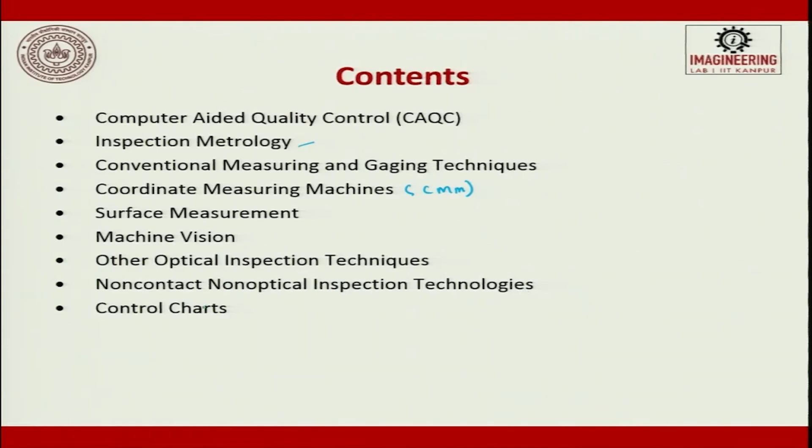So, in this lecture, we will see the following content. The first one is computer aided quality control; we will see the definition. Then we will see inspection metrology, then conventional measurement and gauge techniques. Then we will discuss the coordinate measuring machine, which is exhaustively used. Then we will look into surface measurements, machine vision, optical inspection techniques, non-contact non-optical inspection techniques, and finally, we will see some control charts in this lecture.

So, computer aided quality control is the engineering application of computers and computer controlled machines for the definition and inspection of the quality of the product, which includes measuring equipment management, goods inward inspection, what came inside as input.

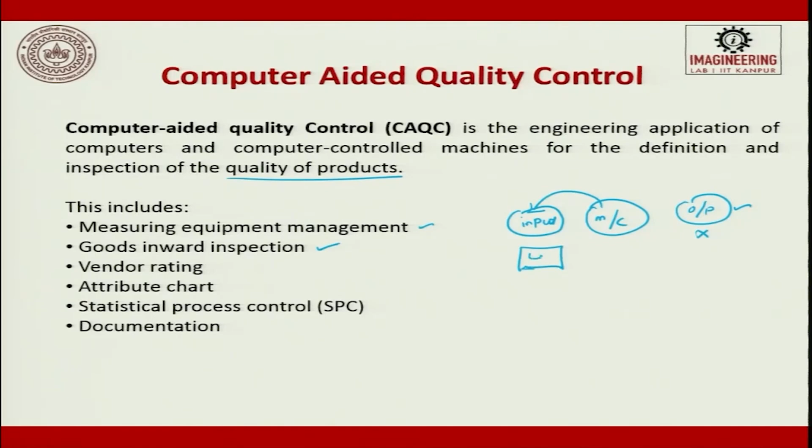See, currently it is pretty interesting. You have a machine, you have an input, you have an output. When the output is good, everything is good. When the output is bad, we just go back and look into the machine. If the machine is all right, many times we say okay, there is nothing wrong, it happened by chance, and we go. But it is also worthwhile to check the input raw material which comes inside, its consistency when it is given to the machine, and then the output. So, goods inward inspection is also very important: what batch size inspection you did and what is their outcome. So, this is also measured in goods inward inspection.

Next is vendor rating, which is very important. I have supplied 10 same items to you over the last 1 year. What is the performance of those parts which I have given to you for machining? So, that is called vendor rating. How perfect I am, what is the scrap which I produce, and how many are marginal, good and bad. So, with that we give a vendor rating.

Then attribute charts, then SPC, statistical process control charts, and finally documentation. All these things are getting into the information of computer aided quality control. Because of computers, all this data can be fitted inside, and it can move along with the parts when they move from factory to factory, from assembly station to the final station, everywhere. So, this is a very important advancement, and it makes the CIMS environment more successful.

Earlier, quality was thought of after making a part, checking for quality. Now it is thought of while making a part. So, not even the first part will be scrapped today.

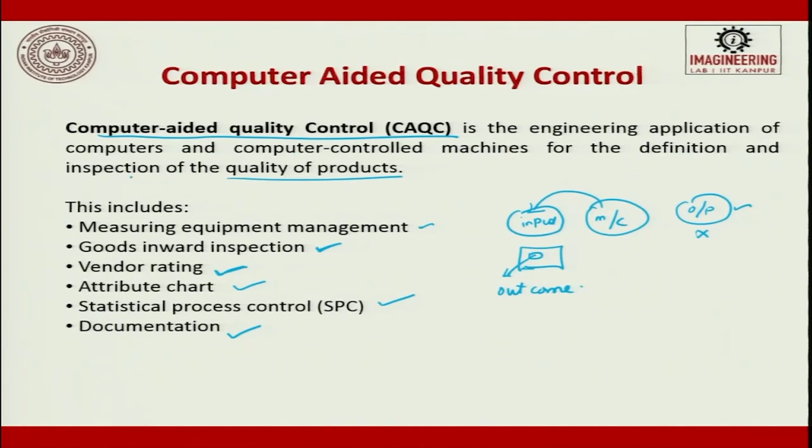So, this is the definition for quality, computer aided quality control. Computer aided quality control is the engineering application of computers and computer controlled machines for the definition and inspection of the quality of the product.

If you put it in a schematic or block diagram, computer aided quality control gets the following information: product identification, process identification, parameters to be tested, upper and lower specification for a part's attribute, and what the quality standards are.

For example, ISO, QS, BIS - these are some of the standards. Then government standards, test programs, test procedure - how to do it. For example, when you have to measure the thermal conductivity of a material, we should follow a certain procedure, establish it at normal temperature and then measure it. So test procedure is very important.

When we are trying to measure the temperature induced phenomena on linear expansion, the test condition has to be at room atmosphere, with certain parameters set. That is called a test procedure. How it has to be done while using a measuring device, Abbe's principle has to be followed. All these things are put in the test procedure.

Then algorithms to evaluate the test data. For example, I have a flat plate. If I want to measure the flatness of this plate, I have to take all the discrete data points across the flat surface. Then I get the data.

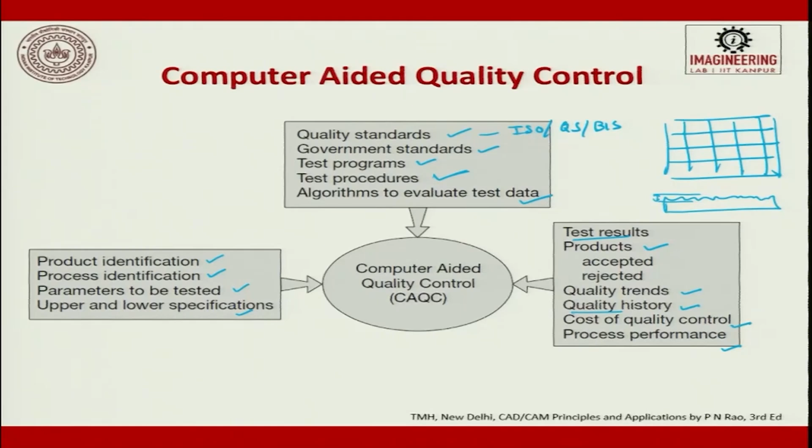So how does this happen - first we will have a CAD. From a CAD it is attached to computer aided drafting and documentation.

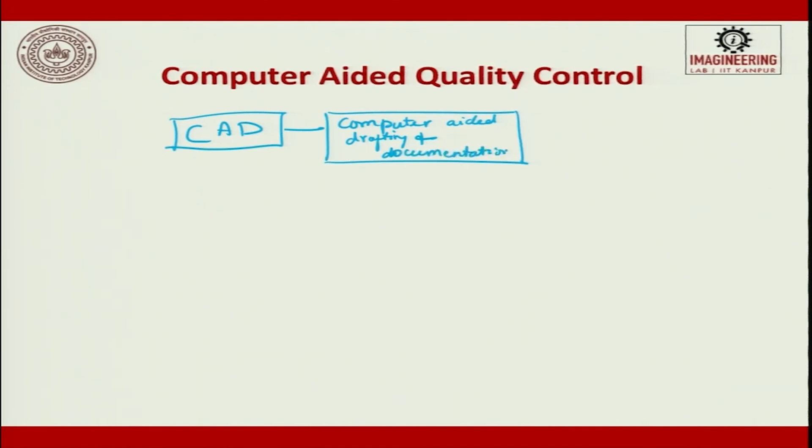From there the data goes to computer aided process planning. From the computer aided process planning it goes to a process planning. Then from there, here you have a drafting, this goes to process planning.

So when I talk about CAD, we talk about product concept and then design engineering. And from design engineering it goes to drafting. So this product concept comes from customers and market.

Here we talk about the QC, quality control, and here comes computer aided quality control. Look at it, how holistically it is all getting built.

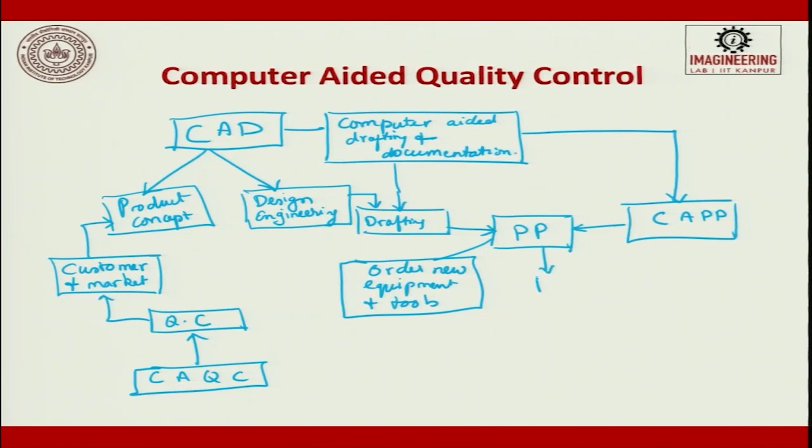From the process plan, what you get is order, new equipment and tools. Then from it goes to a production schedule. And from production schedule it gets to production.

From the quality control, for production we try to have a computer control. So we will have material handling, machines and material handling. So this goes here: the quality control from here to production, and it also gets the information back and forth between these two, and this is the data which flows from here to here.

This is an overall holistic view of the complete industry, and you can see where CAQC comes into action. CAD can be split into product concept and design engineering. Design engineering leads to drafting, and drafting information goes to PP, which is process planning, and computer aided process planning comes here and helps it.

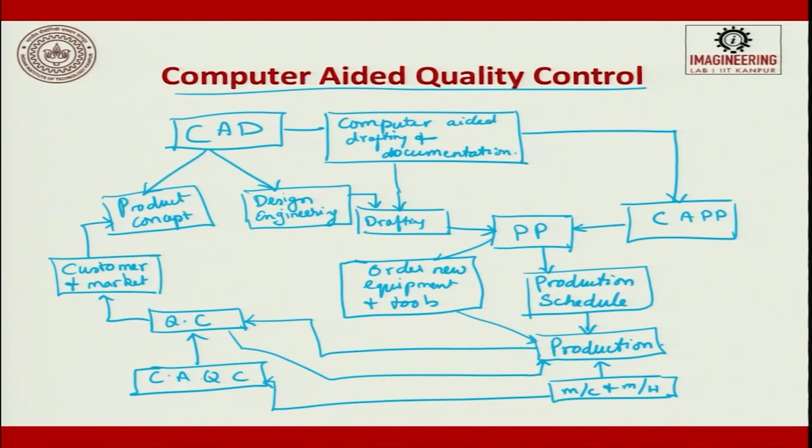From here we try to see whether there is a need for ordering new or old machines, then a production schedule is done and production happens. In production we will have machines and material handling. All these things give an input to computer aided quality control, which in turn gives to quality control. Quality control in turn gives the opinion to the customer, and the cycle gets completed. This is a very important block diagram which talks in totality about everything that happens inside a CIMS environment.

Now let us see what is inspection metrology, which is very much talked about. First we will try to understand what is measurement. Measurement is a procedure in which an unknown quantity is compared to a known standard using an accepted and consistent system of units. You compare against a standard using an accepted and consistent system.

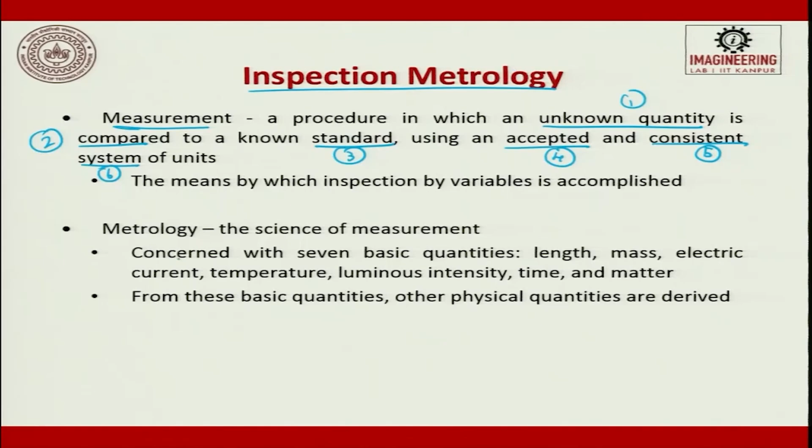So the keywords are: unknown quantity compared with a standard, accepted consistent system of units, the means by which inspection by variables is accomplished. Metrology is nothing but a science of measurement.

Metrology is concerned with 7 basic quantities: we measure length, mass, electric current, temperature, luminous intensity, time and matter. These are the 7 basic quantities which are measured. The science of measurement is nothing but metrology.

So this metrology goes here, that is inspection metrology. From these basic quantities, other physical quantities can be derived. These are the 7, but many things can be derived from them. The most interesting is length measurement, mass measurement, and today exhaustively electric current, temperature, time and matter are measured.

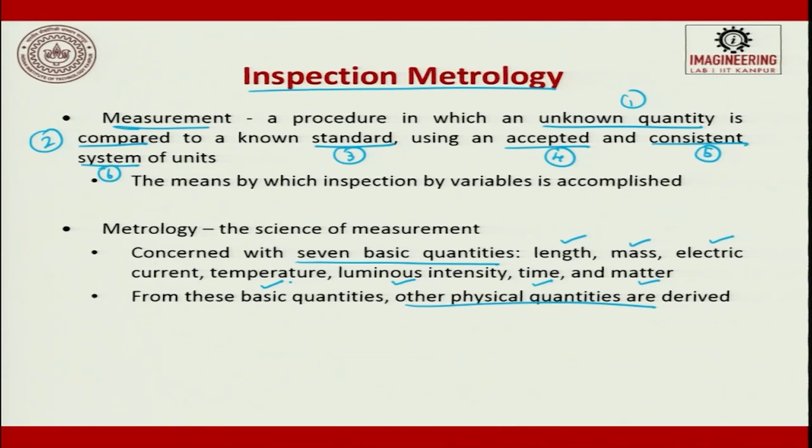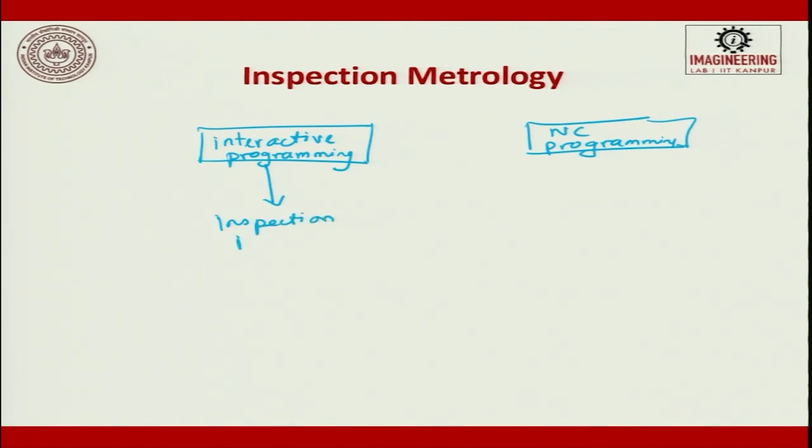When we talk about inspection metrology, we have an interactive program and we have NC programming. So here an inspection program is given, and there is an inspection which is done by a robot or by a machine.

So we will have a machined part. From the NC program what you get is G codes, and this goes to a milling machine, and this leads to the part. So this is the thing.

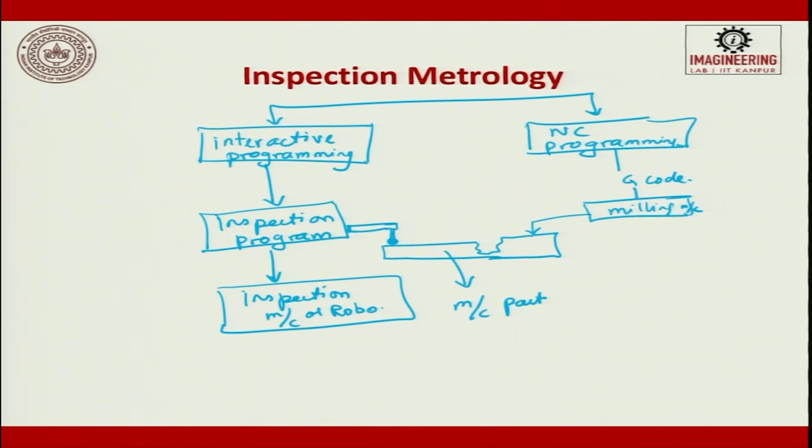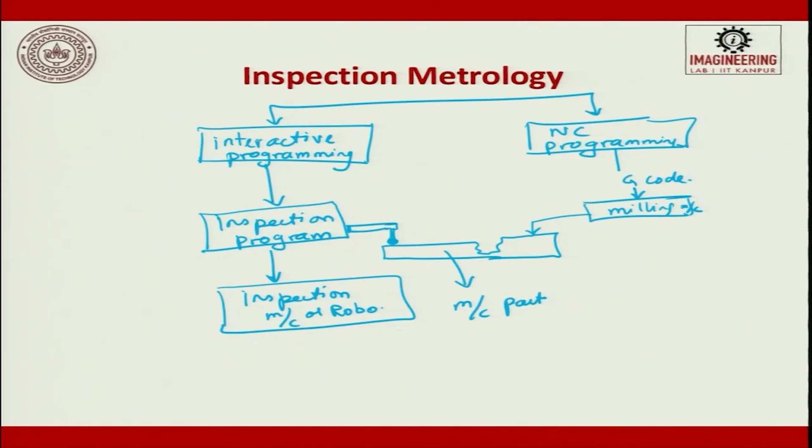You will have an interactive programming, and from the interactive programming you get an NC program. From the same you also try to get an NC program as well as an inspection program. The NC program is given to a milling machine to produce a part. Then the program tells you what this machine has machined, those critical points to be measured, and the measurement will be done by a robot. So this is a separate vertical, and this is a separate vertical. This clearly shows how the interaction happens between the inspection program and the NC program you generate.

The characteristics of measuring instruments: first is accuracy. We have seen accuracy and resolution in robotics and in CNC, so a quick recap. Accuracy is how closely the measured value agrees with the true value. Resolution is the smallest variation of the variable that can be detected.

Between these two you have one more terminology called precision, a measure of the repeatability of the measurement process. Generally a rule of 10 is used: the measuring instrument must be 10 times more precise than the specified tolerance. For example, if 6 plus or minus 1 millimeter is the tolerance given, the measuring device must have 0.1 millimeter as the precision.

The speed of response is how long the instrument takes to measure the variable. You might have data measured, at what time it comes to a computer and how the data gets transferred, the time involved.

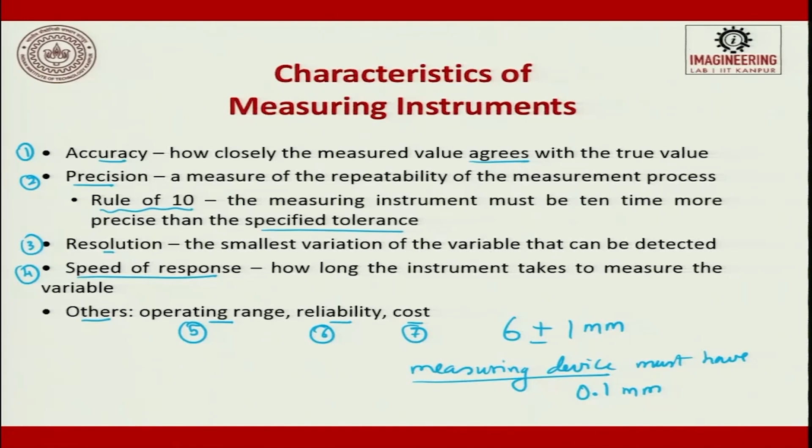The other important characteristics for a measuring equipment are operating range, reliability and cost. So accuracy, precision, resolution, speed, operating range, reliability and cost - these are the 7 most important characteristics of a measuring instrument.

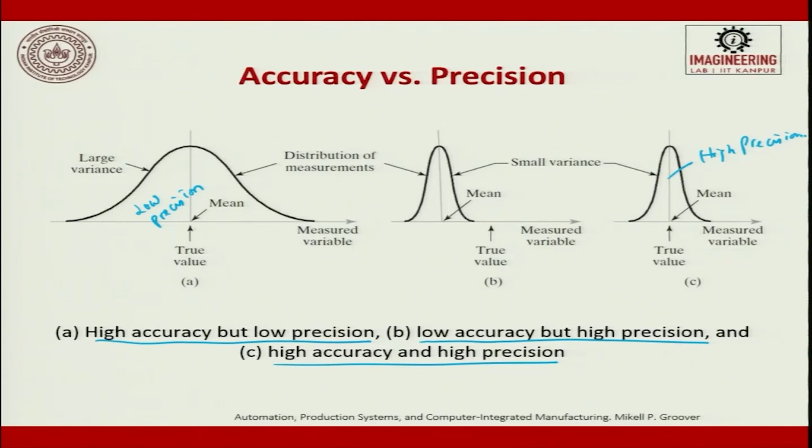There are two types of instruments generally used for measurement: one is analogous, the other is digital. There is a mixed opinion - people say all analogous instruments should be converted into digital and we should use digital data, but now people say that digital puts a restriction on increasing the resolution further. So now it is considered better to have analogous data rather than digital instruments. So there is a mixed opinion, and we can choose either an analogous or a digital instrument depending upon the requirements.

The advantage of analogous is the output signal can take on any of an infinite number of possible values over its operating range. If you want to split it to the smallest level, you can keep splitting if you have analogous data. Reconstructing from digital data to analogous data will always have some error, that is why people say digital has a restriction. Earlier people used to convert from analogous to digital, now people are going from digital to analogous.

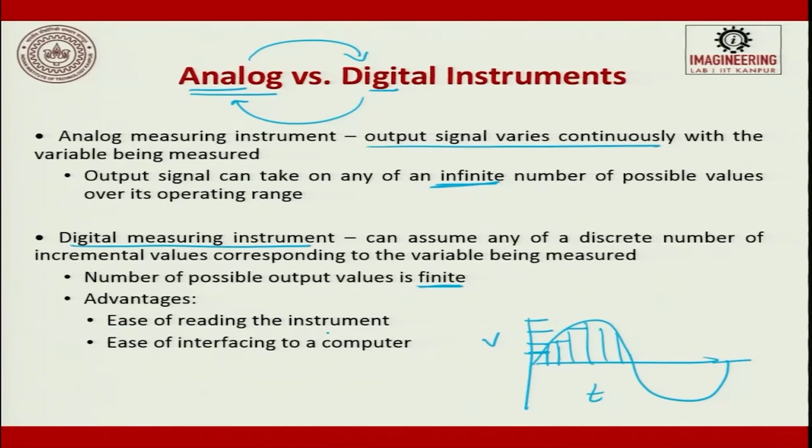So here the number of possible outputs is finite, here it is infinite. The advantage of digital is it is easy to read the equipment and easy to interface to a computer because it is a digital value.

There are two basic types of inspection techniques: one is contact, the other is non-contact. Wherever there is a soft material and wherever there is a complex geometry, we try to go for non-contact inspection.

Contact inspection makes contact between the measuring device and the object being inspected - the instrument and object touch. Here, in non-contact inspection, the instrument and object do not touch.

So what can we use? We can use light, electromagnetic field, proximity sensors can be used, light can be used, we can use pressure and so on. So in non-contact type, it does not make contact with the object being inspected. This is generally preferred for soft and complex geometries.

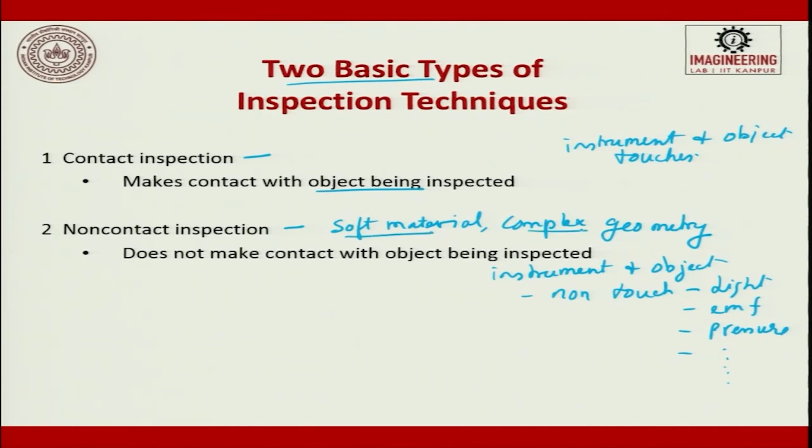Contact inspection techniques use a mechanical probe that makes contact with the object being measured or gauged. The principal techniques are conventional measuring and gauging instruments. Gauges are only used for mass production and are generally used to have a relative comparison - they will not give you the absolute value.

Absolute value cannot be there. It will just measure and say okay, it falls within the deviation, you are getting it. So, conventional measuring and gauging instruments, manual and automatic, all these things fall in this technique.

The coordinate measuring machine is a part of a contact measuring machine. Today you also have non-contact type coordinate measuring machines, in which we use optical exhaustively. Then stylus type surface texture measuring machines are the other thing. So, the three principal techniques are conventional measurements, coordinate measuring machine and stylus measurement.

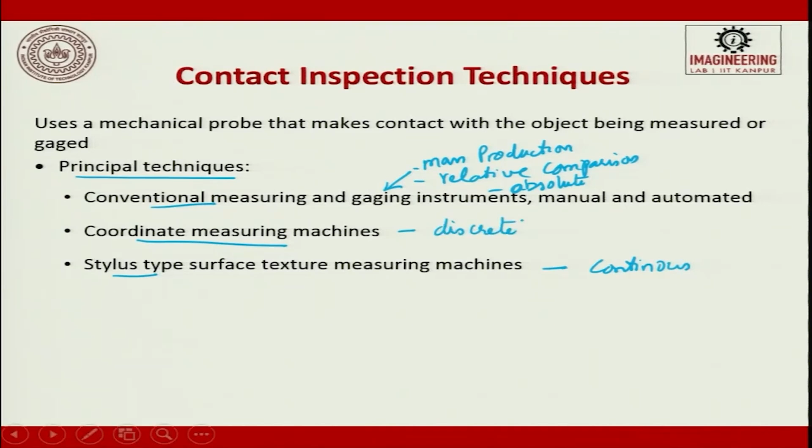So, the difference between coordinate measuring machine and stylus is, here it is continuous data we get, here it is discrete data we get by using the same contact probe, we touch and then get it. So, when we talk about non-contact inspection techniques, they use a sensor or a probe located a certain distance away from the object being measured or gauged.

So, two categories: one is optical, which uses light to accomplish the inspection; the other non-contact uses an energy form other than light. So, the advantages of non-contact inspection: avoid possible damage of surface objects, that is what I said, soft materials, it can be skin, it can be rubber, it can be PDMS, whatever it is. Inherently faster than contact, of course, yes, it is fast because it is going to scribe over and then go, it is not going to touch.

So, it will just move across it, can often be accomplished in production without additional part handling, and then increase opportunity of 100% inspection. So, all these things are possible in non-contact. Today, because of this advantage, non-contact inspection is gaining more importance in a factory environment.

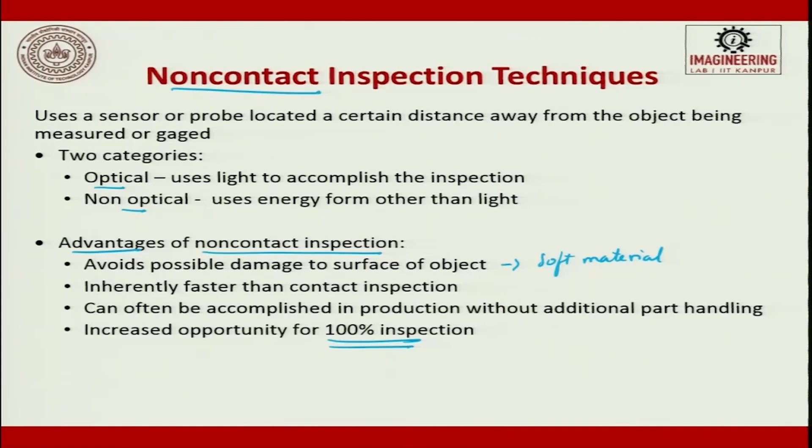When we try to put a PQ chart for inspection technique, this is P and this is Q. This P is part variety and Q is part quantity. So, here if you see manual measuring and gauges, human-oriented work is done here. So, here a human being is exhaustively used in measuring. Next, if we slowly move out, the same thing we could automate, manual and semi-automatic can be done. If it is more quantity, lesser variety, then we go for dedicated measuring machines. And here machine vision is also exhaustively used.

Then when we move to large product variety and quantities are very minimum, we use coordinate measuring machine. Coordinate measuring machine is assisted by a computer. So, it is a computer controlled coordinate measuring machine, wherein flexibility is more, quantity is less. Then we have two more boxes. So, one which is for batch production, we will use flexible inspection system.

We will see what is flexible inspection system later, and here it is motorized control. It will not be computer control, but motorized control. So, it is predominantly by using a joystick. So, between this and this, there will be a small overlap in the instrumentation part of it. So, this is a PQ chart for inspection technology, which is very important for you to understand when we talk about CIMS environment, which equipment to choose and what should be the level of automation in the factory.

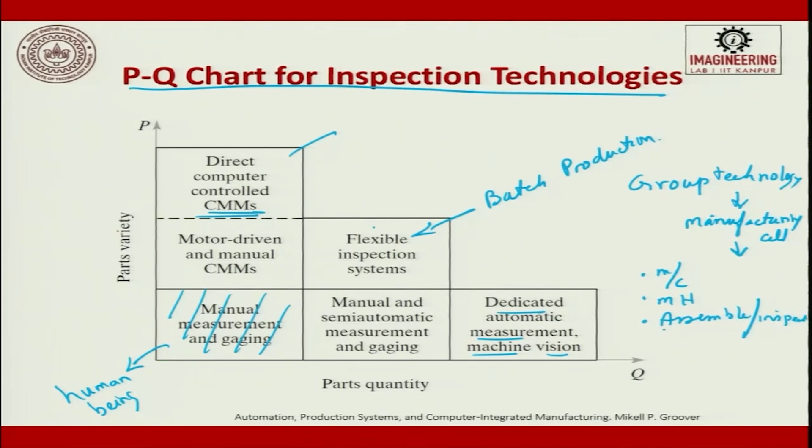When we talk about group technology leading to a cell, that means to say a manufacturing cell, we will have machines, we will have material handling devices, we will have assembly / inspection. So, for inspection, we have to think which machine to use and what should be the level of automation.

So, the conventional measuring and gauging techniques. Measuring instruments provide a quantitative value of the part feature of interest. For example, steel ruler, caliper, micrometer, dial indicator, protractor, all these equipments provide a quantitative value of the part feature of interest. Next is gauging techniques. Gauges determine whether a part feature falls within a certain acceptable range. So, it will not be absolute, I told you.

So, suppose if it is 6 plus or minus 1 millimeter, you will try to have a gauge which measures from 5.9 to 6.1 millimeter. So, within that it will only say go, no go, that is all. So, a gauge is more of comparison measurement. So, it determines whether a part feature falls within a certain acceptable range.

Example, snap gauge for external dimensions, plug gauge for internal dimensions, thread gauges, and then we also have slip gauge. All these things are used for comparison. So, these are the conventional measuring devices and gauging techniques.

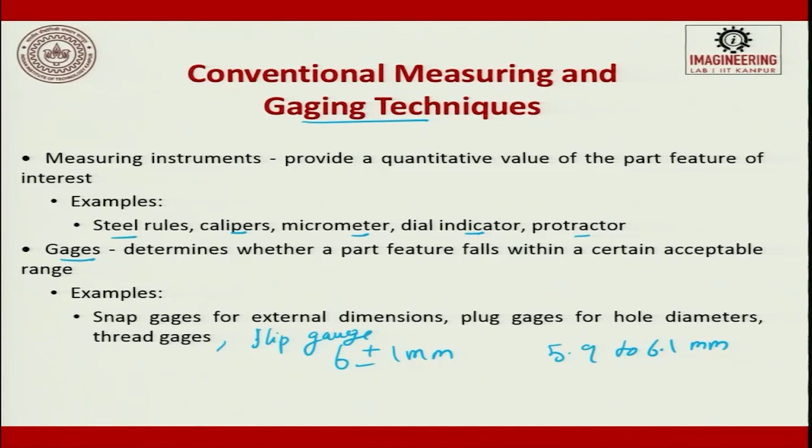So these two, if you go to the PQ chart, are more of manual assisted measuring. Coordinate measurement is concerned with the measurement of the actual shape and dimensions of an object and comparing these with the desired shape and dimensions specified on a part drawing. So, what is that? You have developed a part drawing, you have used it for machining, and now the same part drawing is used for inspection. Now, in inspection it compares with what is given in the part drawing and what is the deviation.

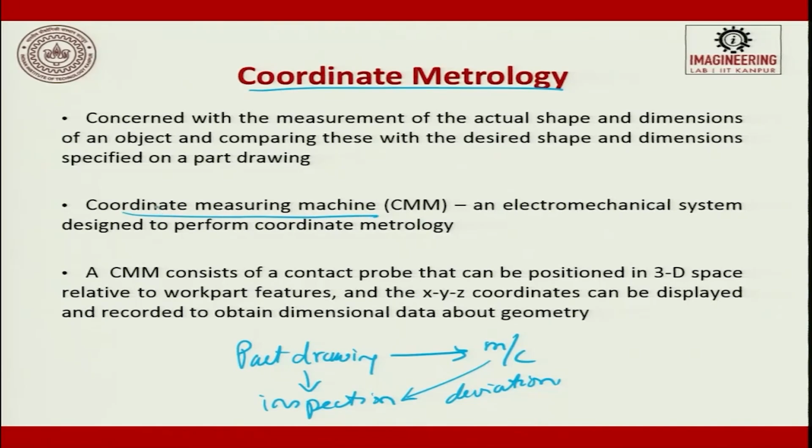Okay. To do this, we will use a coordinate measuring machine. When I say coordinates, x coordinate, y coordinate, z coordinate, r coordinate and theta coordinates are generally used. This is for Cartesian and this is for polar. So, you can use both, or a combination of these two can be used for measuring. A coordinate measuring machine is an electromechanical system designed to perform coordinate metrology.

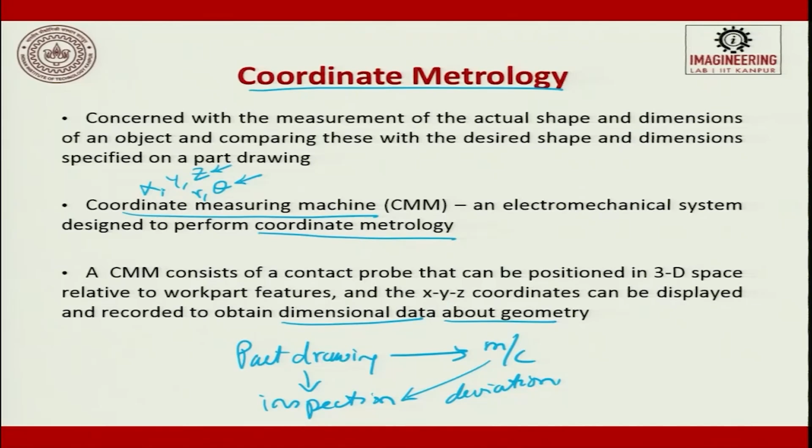In a part drawing, when you draw it in a 3-dimensional view, all you have is x, y and z coordinates. So, while measuring we give the same x, y, z coordinates. A CMM consists of a contact probe that can be positioned in 3D space relative to a work part feature, and the x, y, z coordinates can be displayed and recorded to obtain dimensional data about the geometry. So, dimensional data is nothing but the x, y, z data. So, this is a typical coordinate measuring machine.

The interesting part of this measurement is you can have one point as reference for the entire object. For example, if you try to use a vernier caliper and a dial gauge and other measurements, it is very difficult for you to measure with respect to one reference and give the data. But in CMM, it has a one point reference. You put a calibration dial, you calibrate it and then you make it the world coordinate system 0, 0, then you transform to the user coordinate system, measure it on the part and then report it.

So, the coordinate measuring machine is an instrument which is exhaustively used in a CIMS environment. So, the data is attached to a computer, the computer gives data, records data and finally generates the deviation chart for features. All can be done by a computer.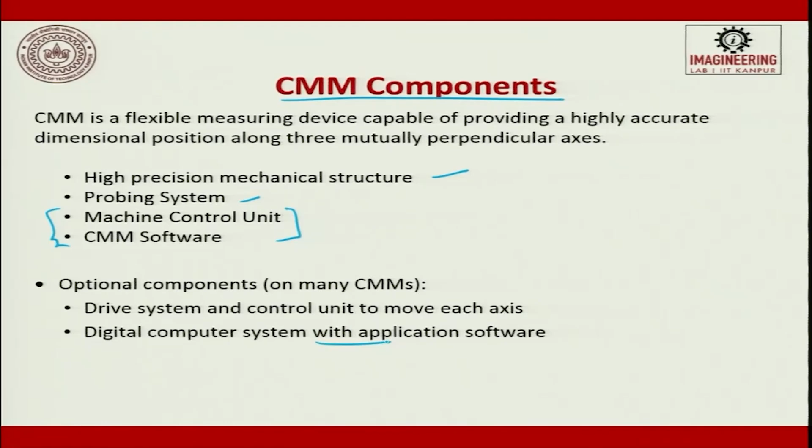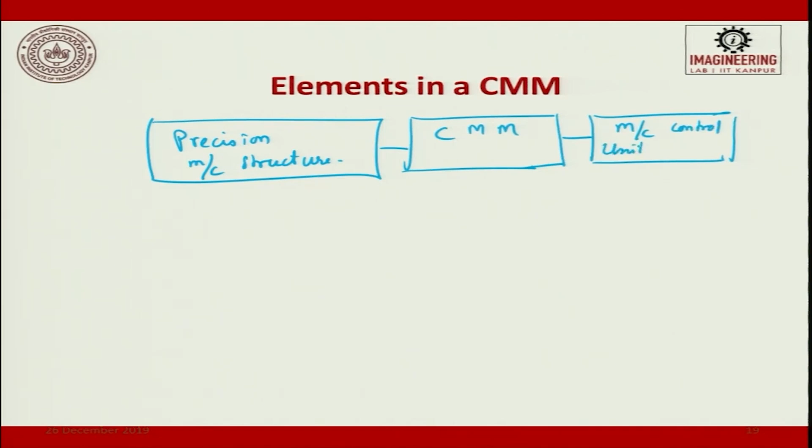What are all the elements of a CMM? You will have a precision machine structure. This leads to a coordinate measuring machine. You will have a machine control unit, computer, then you have a CMM software, then you will have a probing system.

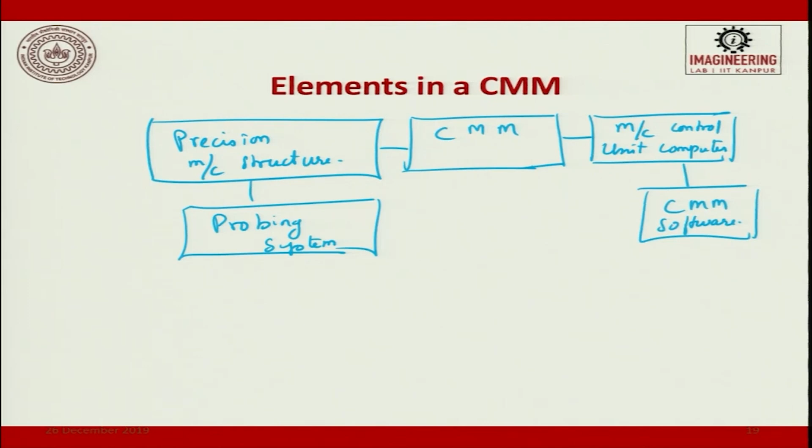So, this is how a CMM works. So, here is a part. This is a probe. This is the structure that moves, and this is the probe, and then this is the world coordinate system, and here you will have a user coordinate system, and here the probe touches the workpiece, and where you see dots, these are all the points. Suppose you want to take a plane, so it touches 6 points and it tries to generate a plane surface.

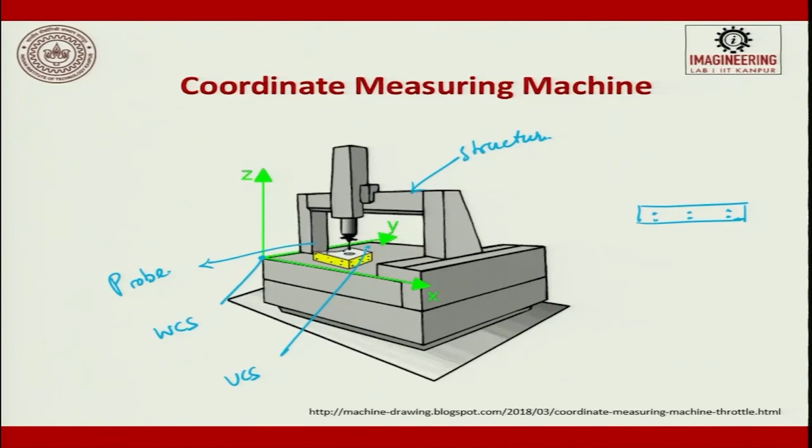So, these are the points, the data points are taken, and then with the help of a computer we try to get the data. You can see the world coordinate system x, y, z, and then you see how this coordinate system changes, so that they get all the data on these different types of surfaces. You see here it is transformed, so it is rotated, and then you try to get it. So, you can transform with respect to this probe or with respect to the workpiece. Okay, I would prefer that you put it to the workpiece itself. The world coordinate system can be transformed to the user coordinate system, and then you try to get the output.

So, the most critical part is the structure, wherein the resolution, repeatability, reliability, precision, all these things are taken care of. But the heart of the CMM is the probe. So, a probe has a spindle to hold the probe. This is the probe head, and this is the probe. So, the tip of the probe is always circular in nature. Why?

Because you can get a point contact, or if you have a dot there, it might get worn and torn. So, it is always better to put a circular one, so you get a point data. So, circular is very useful when you have a perpendicular surface or an angled surface, so it can try to measure. So, this round is a sapphire ball, alumina ball, or a ruby ball which is used. It is highly polished and it is placed at the tip.

So, this is the stem. The stem is very sensitive. So, any touch it can quickly detect and then do it. You can have a single probe, you can have something like a star probe.

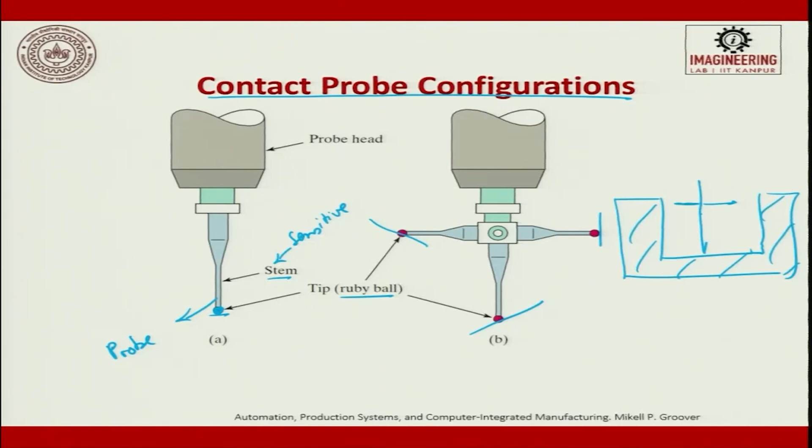So, star probe, if you have a hole to be measured. Now if you use a single probe, it is going to take time. So, what you do is you try to do the depth and simultaneously move along the sides to get what is the width or what is the diameter of the hole and the depth of the hole. So, for this we use star type probes. There are several configurations, I have just put only 2 for your understanding.

Very interesting. And it is all done automatically, by the way. You can do it manually by a teach pendant, what we studied in robotics. We can also have a teach pendant, or we can write a program to do it, or we can manually operate by a pendant which is there. So, this CMM works on the programmable type. All the 3 options are open.

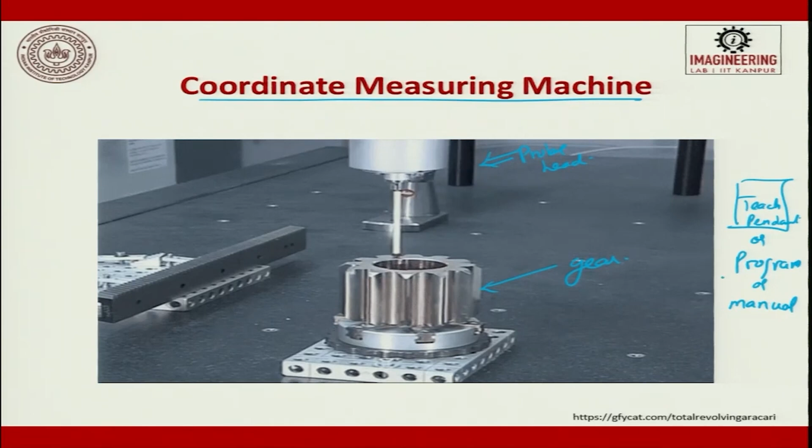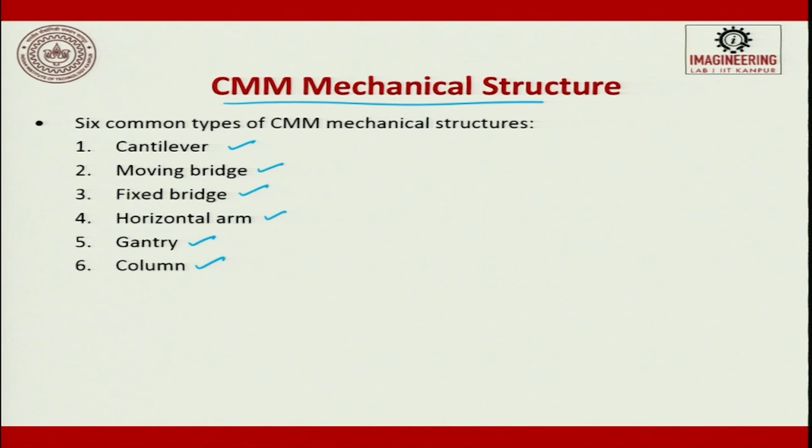So, the mechanical systems: there are 6 common types of CMM mechanical structures. Why is this? This is like a robot, what we studied, body and arms, same way we are studying here. Structures: cantilever type, moving bridge type, fixed bridge type, horizontal arm, gantry type and column type. You have to choose a structure depending upon the size and shape of your component, because this structure is going to decide the resolution, repeatability, reliability, precision of your system.

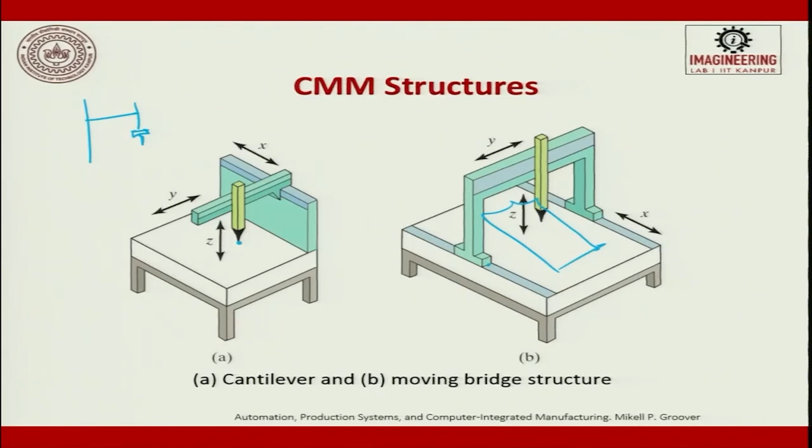The advantage of this moving bridge as compared to the cantilever is, in the cantilever, an error happening in the x axis will be carried to the y axis and z axis values. Here, it will be removed to a large extent. If there is an error in the x axis, you can nullify it after measuring with y and z. So, it will not be carried. So, the third one you can have is a fixed gantry but a moving table.

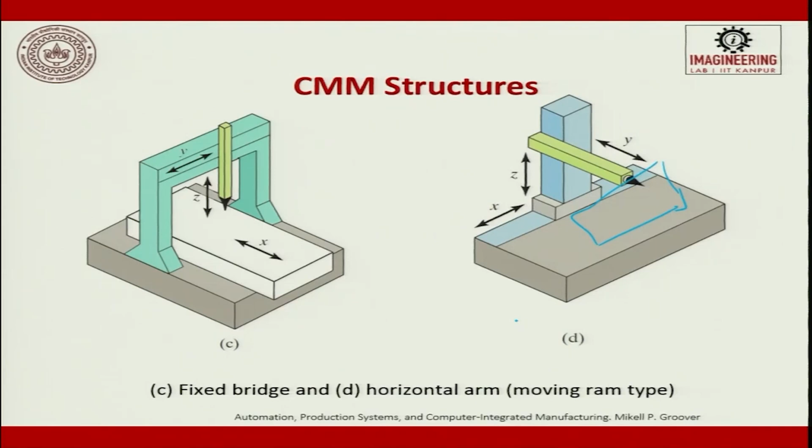The next one is horizontal arm. The difference between the horizontal arm and the cantilever type is, there is a horizontal and then there is a vertical. Here there is only horizontal. So, if you have a large component along a plane and you want to measure it along the vertical axis, then we use this horizontal arm. Then you have a gantry type, and finally a column type. These are the 6 common CMM structures which are extensively used in the factory environment.